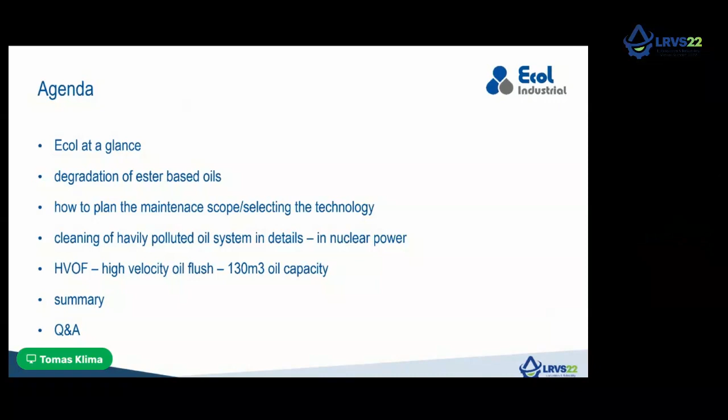Then I'll introduce in deep focus the technology of hydrodynamic cleaning of a turbine oil system, especially here in a specific nuclear power plant where we did the service, with a lot of photos to share with you, followed up with high velocity oil flush of a very large system with oil capacity of 130,000 liters of turbine oil.

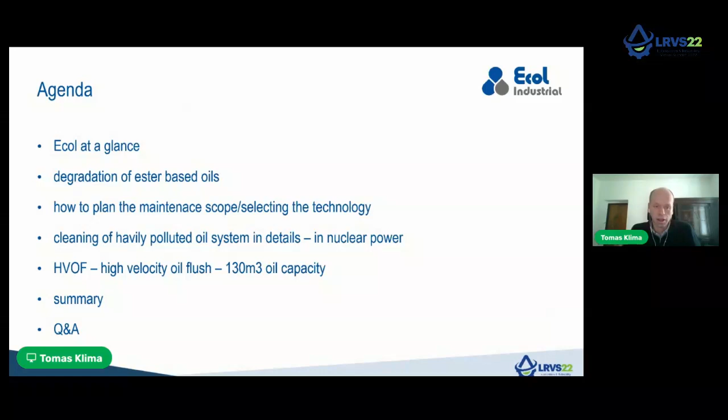At the end, a short summary and then answering your questions.

Ecol is a service-oriented company providing services worldwide, with headquarters in Europe, in Poland, and with subsidiaries in Czech Republic, where I belong to as Ecol Industrial, and a subsidiary also in North America as Ecol North America.

The services we are providing on the market are lubrication and oil services, cleaning and flushing of oil systems, condition monitoring, oil care, and varnish mitigation experience. We have our own laboratory where we analyze the oils and greases.

We are an authorized partner and technical partner from Lotos, Fluitec, and Grease Thief.

We specialize in lubrication management outsourcing, which my colleague presented, where we service over 24,000 pieces of machinery every day, with almost 400 people on board and 70 plus engineers within our company. Yearly, we are delivering 1,500 tons of lubricant. So the scope of our activities is very large.

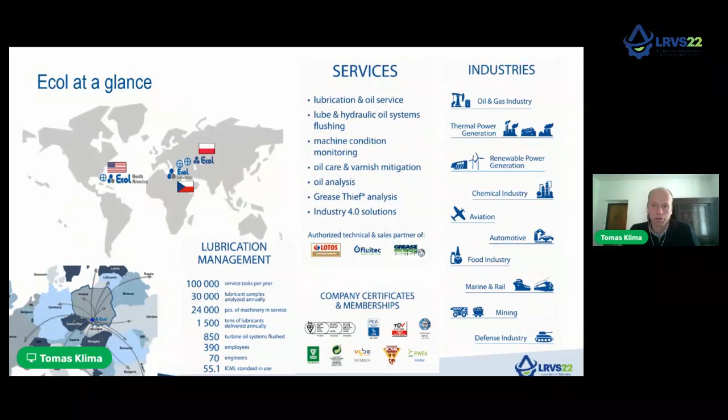The industries we serve you see on the right. I'm especially focused on oil and gas, power generation, and chemical industry. Now I go to the point of my presentation, because the case study I'm sharing today with you was a turbine oil system in a nuclear power plant.

The system was run on ester-based oil, where water is a very dangerous contaminant, and the water content should be maintained very low. Otherwise, hydrolysis is the degradation process that results from high water content.

Hydrolysis is actually degradation or breakdown of the base oil molecules, followed by additive depletion, formation of acids, and of course followed by severe corrosion of the components inside the oil system, especially corrosion of the pipeline.

The aging products from the degradation process and rust pollute the oil system, resulting in increased wear and component degradation.

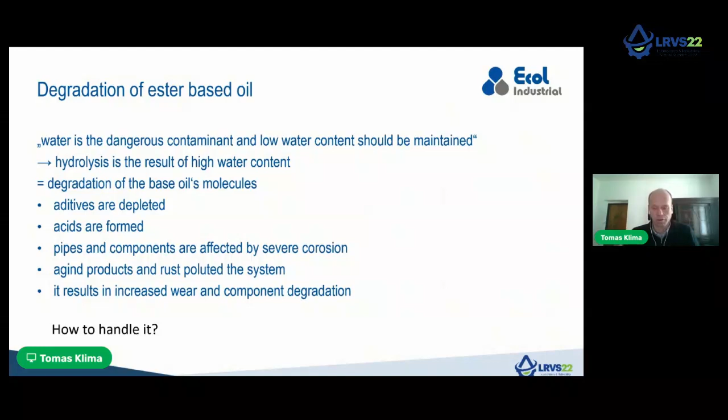So how to handle this issue is the question addressed in this presentation. To evaluate the maintenance prepared for the overhaul or the service, we need to figure out the level of contamination based on lab reports, of course, looking at trends and history, and the lifetime of the oil.

We also evaluate operational issues like temperature, vibration, water content, filter exchange frequency, maintenance history, and if possible, if the customer is smart.

From time to time, also doing video endoscopy of the system to have the background for the decision—not looking only at the oil analysis reports, but also at the real state and real condition of the oil system.

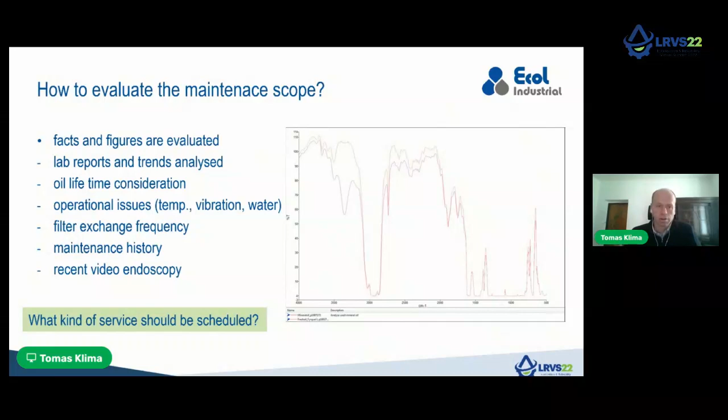If we have information that the system is dirty, and we got information from our customer at the nuclear power plant that the oil was in very bad condition and the system should be cleaned, then we consider together with the customer what options could be done for the service.

Of course, draining the oil and putting in new oil, plus maybe cleaning the oil reservoir, is the cheap option and a good option for financial management, but it has a lot of disadvantages, where the new oil dissolves all the deposits and brings problems for future operation. Dissolving also means running through the system and damaging the components.

Chemical cleaning is a technology I see used very infrequently. It's dangerous for handling, and also dangerous for the environment, and it has a big disadvantage in that it contaminates the new oil after the service, because chemical residues remain in the system and contaminate the new oil.

Solubility enhancers is an option also used today. We have our own experience with it. It has its limitations and advantages. The limitation here, for this case study I'm bringing to you, was the high amount of degradation products plus really massive corrosion in the system, and also the size of the system.

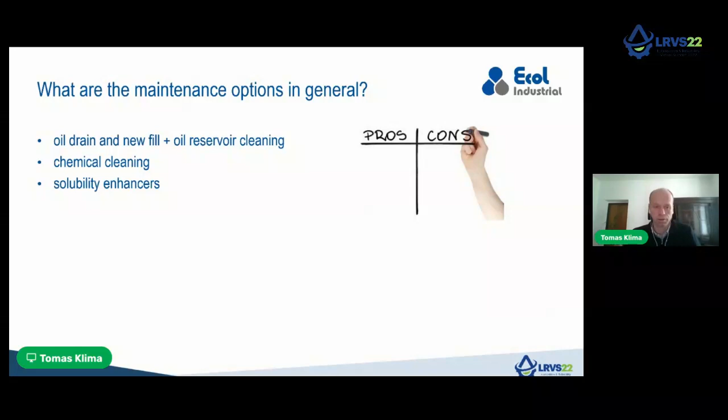There is technology that I'm going to present to you: hydroblasting, hydrojetting. It is applied, and I would recommend always to apply it when a severely contaminated system is in place. I mean a lot of varnish inside, aging products, massive corrosion, or if we have some component failure like bearing failure, which is massive pollution for the system, very hard to flush out.

When oil is exchanged, it is underlined because this is the time if we are changing just the oil with a new additive package, which is very well dissolving the old deposits and making problems during the operation. Usually the filter exchange frequency is very high, and the component failure or the availability of the unit is very affected.

When a new system is installed, it's also the answer to the title, whether to clean or install new. When installing new, you always have new pipes, but they are not clean. They are full of debris from cutting and grinding, and you need to flush it out afterwards and clean it before going into service. So it's better to clean it.

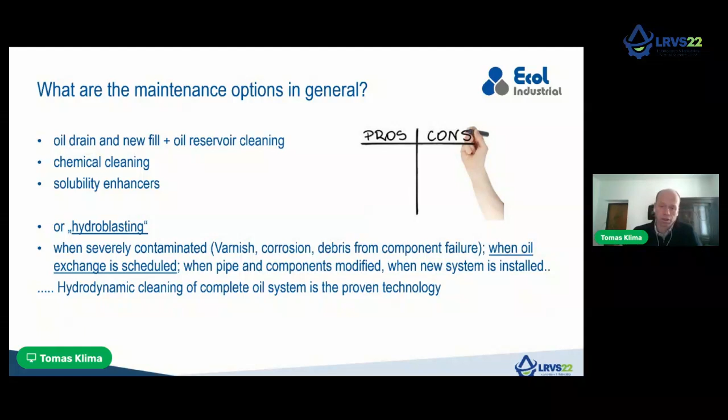Hydrodynamic cleaning of oil systems is the proven technology, which I will show you later on. I'll also highlight the specifics in nuclear power, because we've been working in nuclear power since 2008 and we know the environment very well. Safety first is the main approach in nuclear power. Running on full load with high availability is the general goal, because when it's built, the operational costs are much lower compared to conventional power plants.

Due to the size of the turbo generators, the oil systems are of large volumes. Personally, I'm experienced with turbines here in Czech Republic with a volume of 100 tons of oil. In this case study, I was also present during servicing. It has 130 cubic meters of oil in service, which is really huge. The turbine is 50 meters long, and the size of the pipelines is very large.

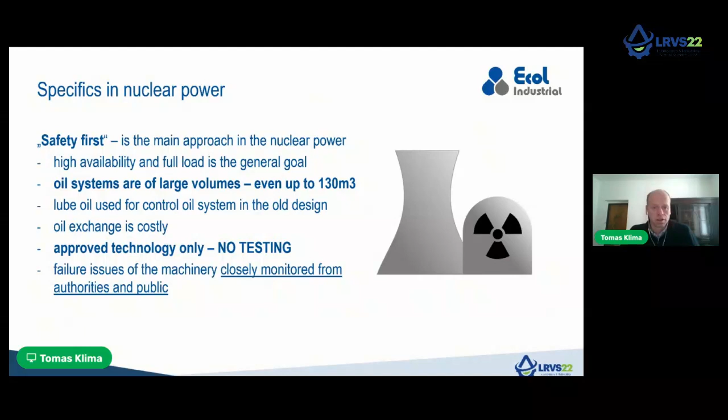Lube oil is usually the same as control oil in the old design, and oil exchange is costly due to the volume. No one in nuclear power is willing to test any new technology, and they don't like testing. They only like approved technology, because all failure issues are closely monitored and reported to authorities and the public.

So when severe degradation and corrosion need to be cleaned, there is a certain way to get rid of the deposits, which is the mechanical force of water jets. This is highly effective to dissolve and remove the deposits, and it's easy to prove.

As you see, the state of contamination of the system presented here was very massive. The system was oil based on esters, due to the decision that it would be safer for the operation. However, hydrolysis here caused very massive pollution of the system over the years.

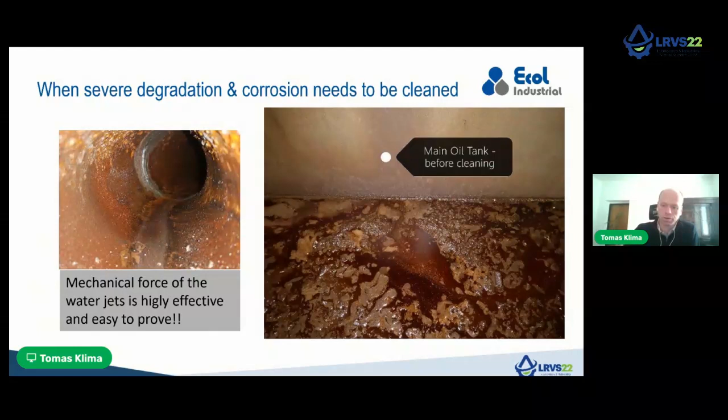Coming to the technology of hydrodynamic cleaning, or hydroblasting, hydrojetting: in this operation, high pressure water is sprayed on the surfaces, penetrating very well both soft and hard deposits, especially varnish and degradation products. This includes any kind of sludge, any kind of deposits like corrosion, or even welding cinders.

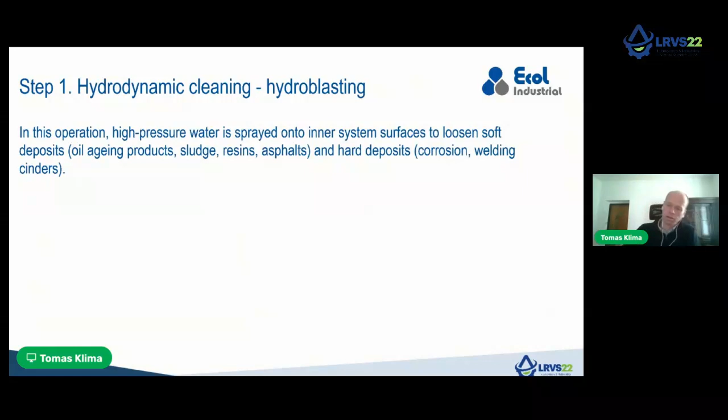How does it look like? The cleaning consists of 4 operations. First is the operation of hydroblasting. You can imagine, on the right corner, this is the rotating nozzle that rotates at high speeds with high pressure water jets that are penetrating the deposits inside the pipeline.

This means these deposits are penetrated and flushed out from the system with the water stream. The pipes are cleaned more than once, two times, three times, and the effect of cleaning is checked visually or by video endoscopy. The pressures we are using are very high, up to 150 megapascal, so 1,500 atmospheres or bars, for you to recalculate it.

The second operation is very crucial, especially for systems with ester-based oil, where the water content should be minimum. This was the biggest concern here from the customer: how to clean it, how to dry it, and be sure that no remaining water is in the system. Generally, it is dried with compressed air with high volumes of compressed and filtered air.

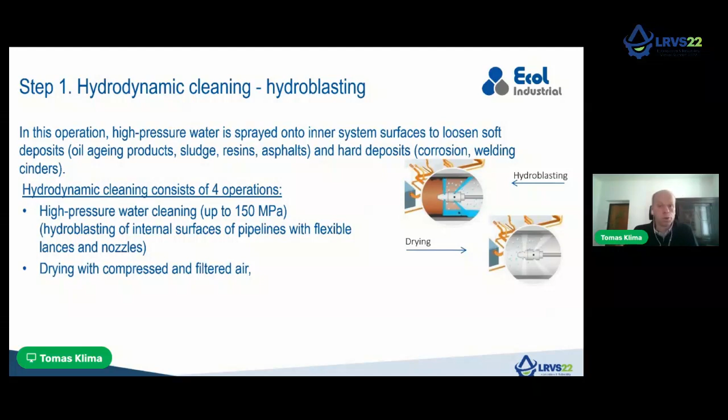At this specific power plant and turbine system, we used extra dryers, kind of ventilators that were venting the system with dried air. After the drying process, we also inserted silica gels in the openings and pipes to be sure that humidity would not affect and collect in the pipes afterward.

After cleaning, the system is sprayed with operational oil as a prevention for corrosion, and the open pipes and openings on the system elements are covered with plastic foil or with special covers.

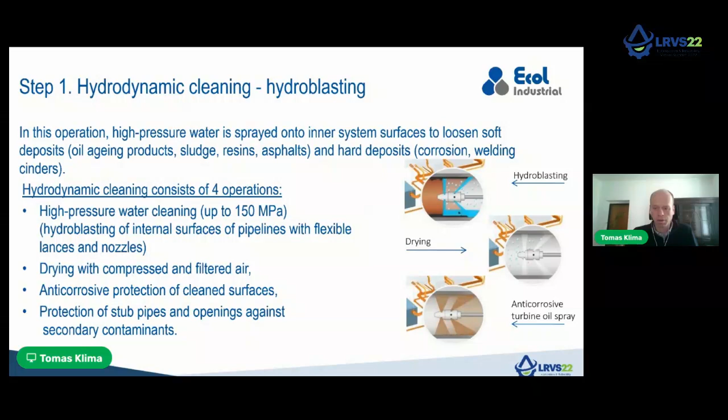So this is the process of cleaning, where all the pipes are cleaned with this method and these steps. And I will show you how it looks like in action.

On the left corner, you see the rotating nozzle, which is to show you how it looks like. However, in the speed and operation, it's centralized in the middle, and the water jets penetrate the deposits. It is pushed through the pipe from one end to another, and all the openings are covered with foil to collect the wastewater.

All other components are also cleaned, disassembled, like oil coolers that are washed and cleaned and assembled back for the next step, which is flushing.

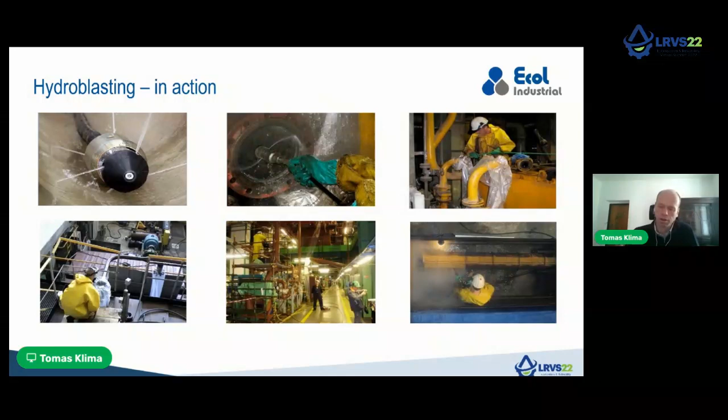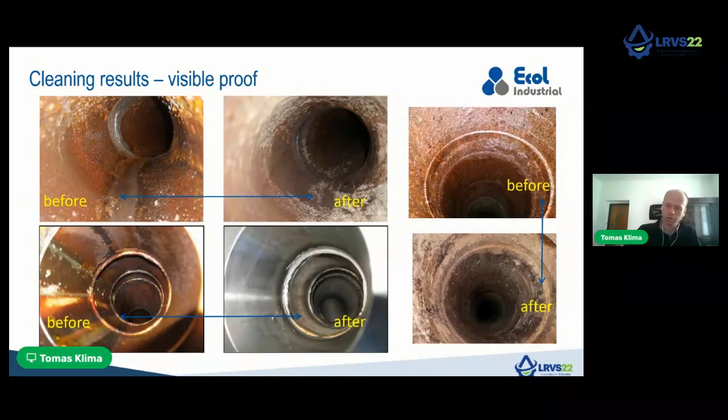Other pictures, down below, this is not from this power plant, however to show you fully the size of the effect. You see on the stainless steel before and after how it looks like, what is the effect of hydroblasting.

After the cleaning, the inspection is done. As I told you, video endoscopy is used. You see that we are going through the pipes, which is measured, monitored, and also reported to the customer that everything is fully clean. And of course, it's good to have the pictures before, how it looks like, to compare it.

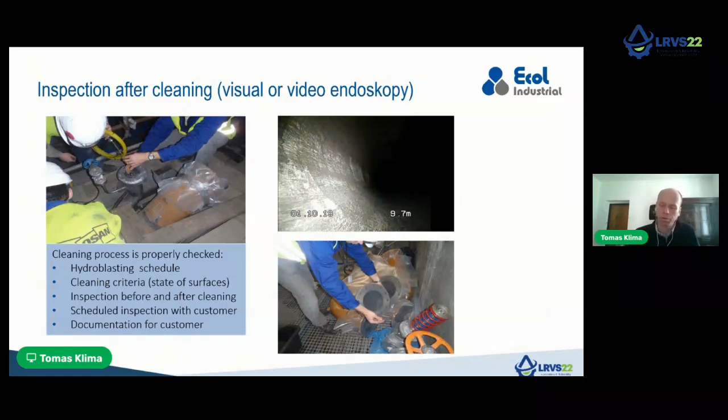And there is a second step of the technology necessary to follow, because cleaning - it's good that we penetrated and flushed out most of the deposits. However, something will remain. The flow of the water jet is not high, and it's not perfectly clean. So high velocity oil flush is recommended,

which has its parameters. We are using external pumps and filters. We are installing bypasses on important places like bearings, servo valves. When control oil is also included, we are bypassing or installing jumpers on pumps and using our pump, which has high velocities.

The filtration is done through absolute fine filters with 3 micron size and with a high filtration ratio of beta over 1000. And also, I will show you on the pictures several important places like bearings and inlet to the bearings, inlet to the servo valves. We are installing special check filters with fine mesh and strong magnet.

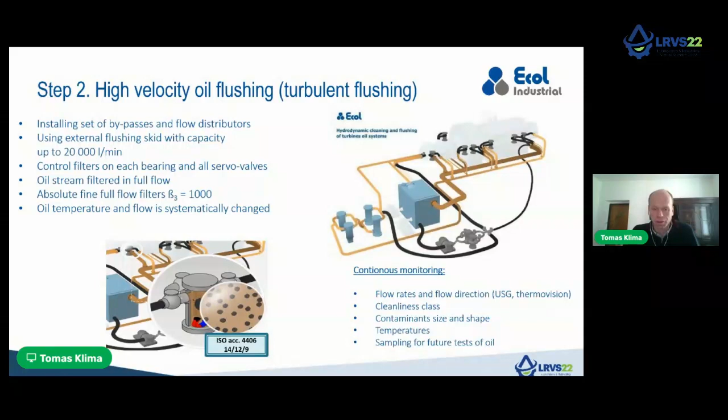So how we approach, what are the specifics of our technology, of our flushing, high velocity oil flush, is that we are installing the check filters that I was mentioning. These special check filters are allowing the team to close the line, continue with flushing on other pipeline, and to check the cleanliness at a specific place.

It is also allowing us to take the samples at those places and check the cleanliness of the oil and also cleanliness of the magnet. I will show you later some other pictures.

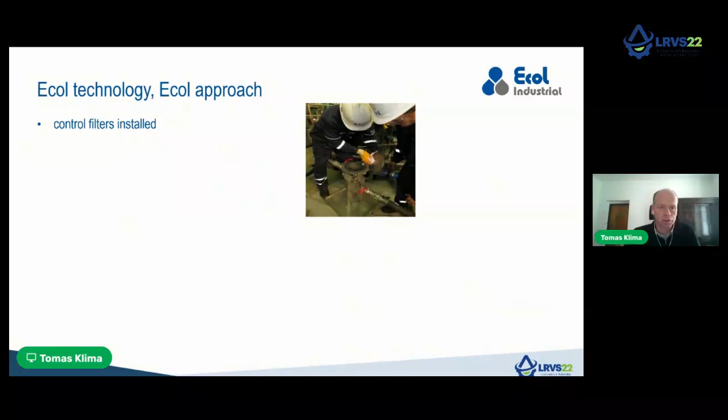Second specification is that all jumpers are equipped with valves, which allows us to control the flushing process, allowing us to increase the flow, to reach the high velocities in each and every pipe, and also allowing us to do the thermoshocks,

which means we are cooling down the specific lines when closing the bypass and then opening it to flush with hot oil.

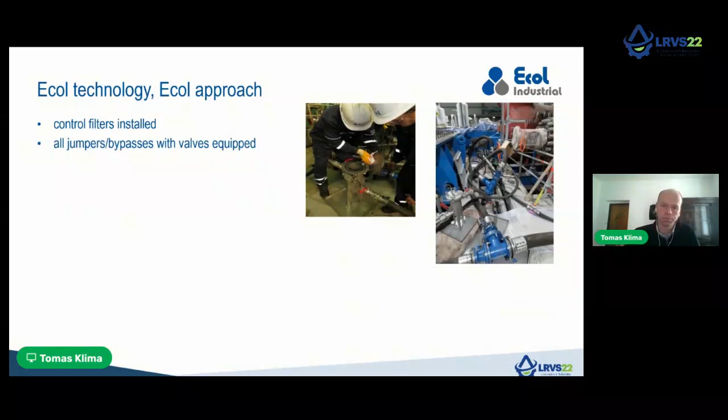Full control over the process, allowing us to flush each and every pipe with high velocities. The full flow is monitored with measurements and also reported to the customer.

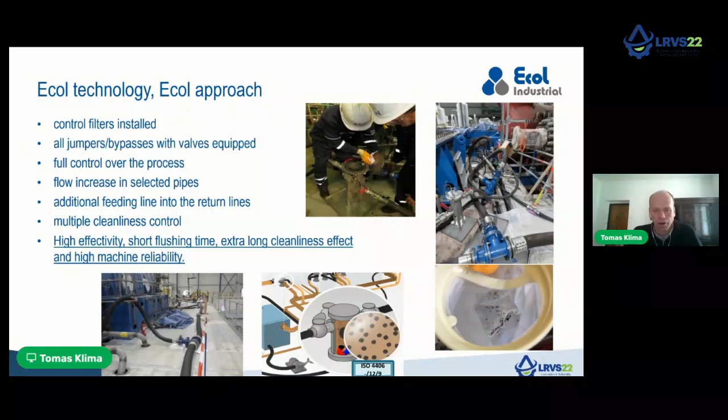And there are several places where we do multiple cleanliness control, not only the ISO code or NAS code from the oil tank, however, from many places. This is a very effective flushing process with a very short flushing time and extra long cleanliness effect and high machine reliability followed.

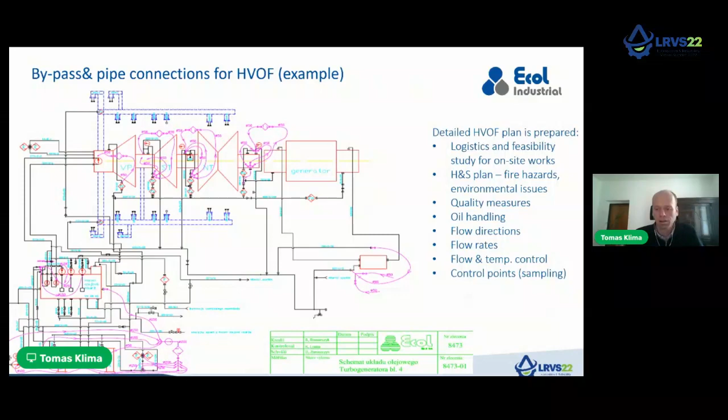Our engineers, before going to the project, are preparing for the cleaning process as well as for the flushing process, showing also to the customer how we are installing and where the bypass is, how the lines are being flushed, and this is the pre-engineering before starting the job.

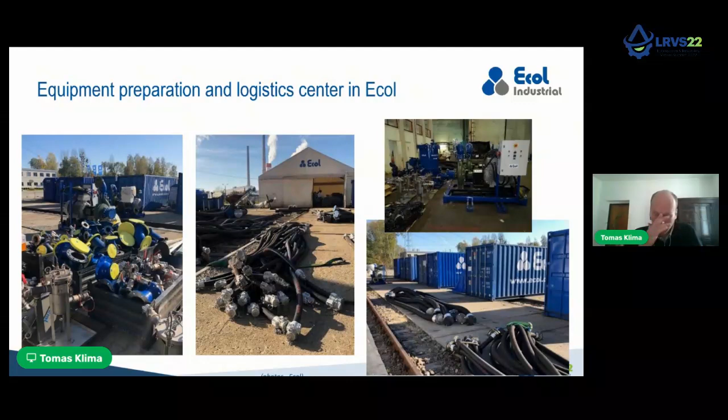It means also a lot of preparation and logistics. If you see the hoses prepared for some general project, or for the project as I'm presenting here, it is a lot of equipment that we need to ship to the site and also install it on the system.

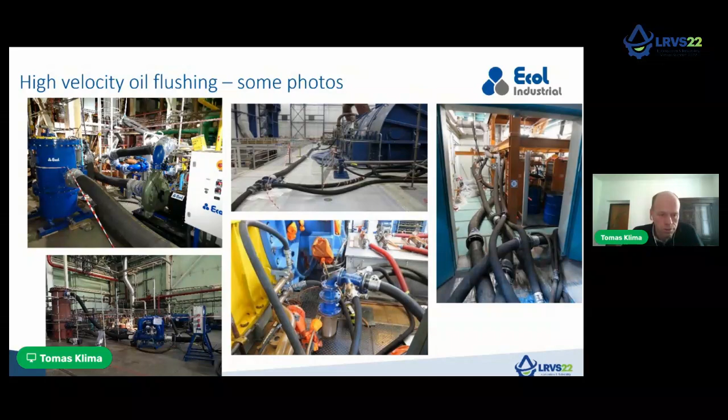On the left down corner, you see extra flushing of the oil cooler, because this is a massive, high volume oil cooler that needs to be flushed separately to shorten the flushing time and not make the flushing longer. We have special equipment that flushes the oil cooler in both ways, turning the direction of the flow, which allows us to make it shorter and more effective.

Other pictures from other projects show the scale, what it means to install all the bypasses on the bearings of the turbine. In the middle, you see a 200 megawatt turbine, so imagine how it looks on the 1000 megawatt turbine that I'm presenting here.

However, the design was Russian, and all the pipings are under the turbine, so we have no picture like this to show the scale. As you can see on the left corner, there is this specific check filter where we are taking samples during the flushing.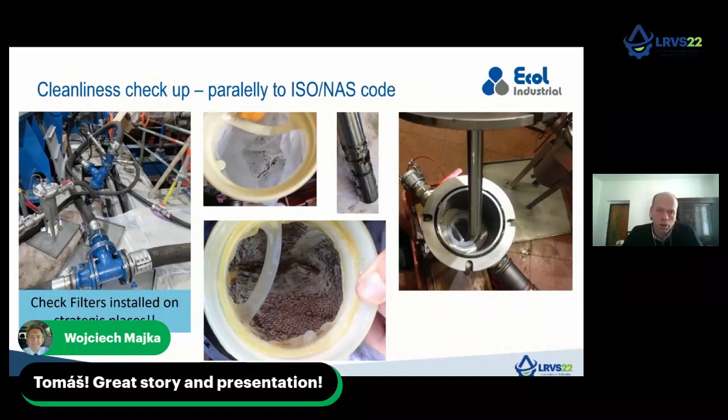Also checking the filters and the magnets, the construction of the filter you can see here on the picture on the right. The neodymium magnet is very strong to catch all the debris and magnetic particles that are trapped on it. Inside is a specific filter with size of 100 or 75 micron, or whatever size the customer wants, and there we are checking the cleanliness and the particles present in the system, not only the ISO code from the oil sample.

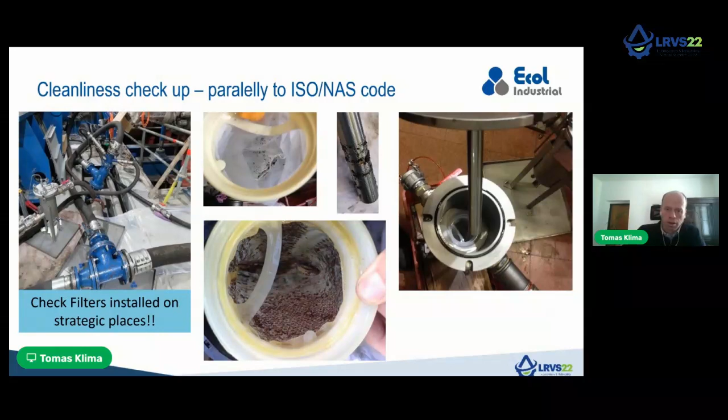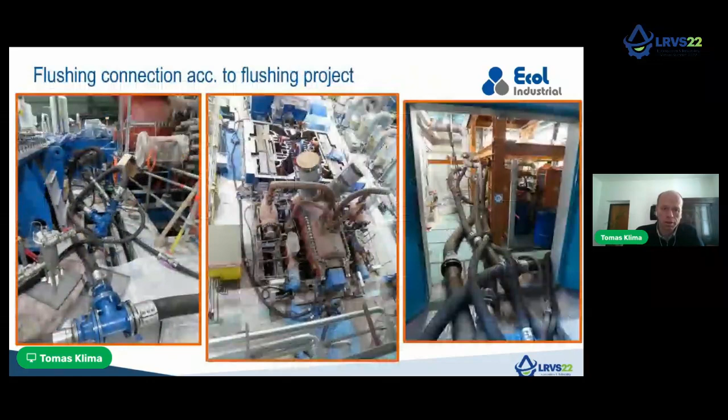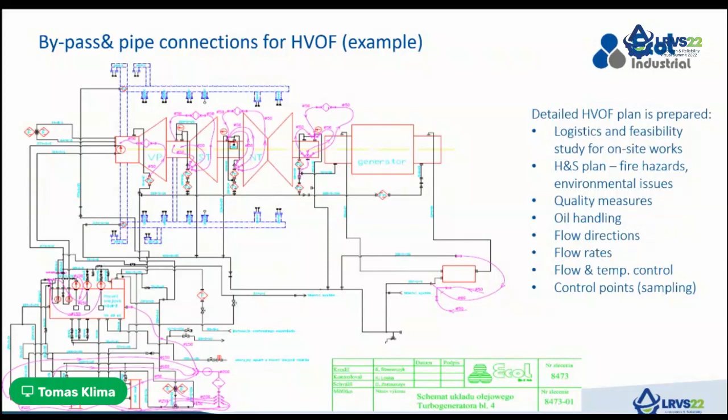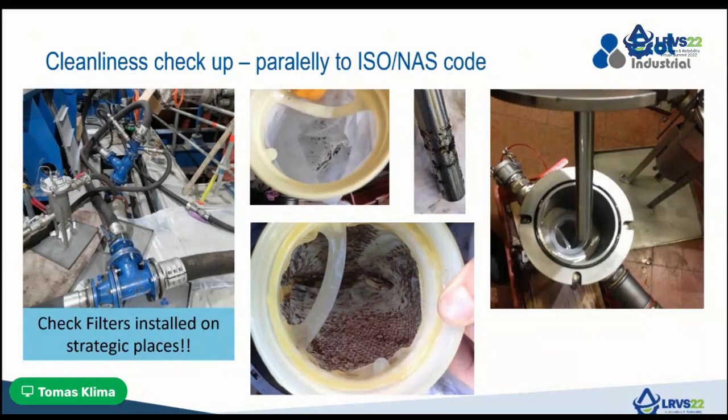On site we are of course taking samples. The samples are taken from several places. Going back a little bit, you see that on each bearing there is a control filter where we can sample the oil and also control the special filter inserts, which is much better and faster, also speeding the flushing process, allowing you to continue flushing and control the specific place. Because we can close it, take it off, control it, change it, and otherwise flushing on other places is still continuing.

So when taking samples from the control filters, they are monitored under the microscope and also with the particle counter, which shows us the cleanliness code and also the relative humidity of the oil, showing what is the water content, to prove to the customer that the system was dried completely. And of course, this is only relative humidity.

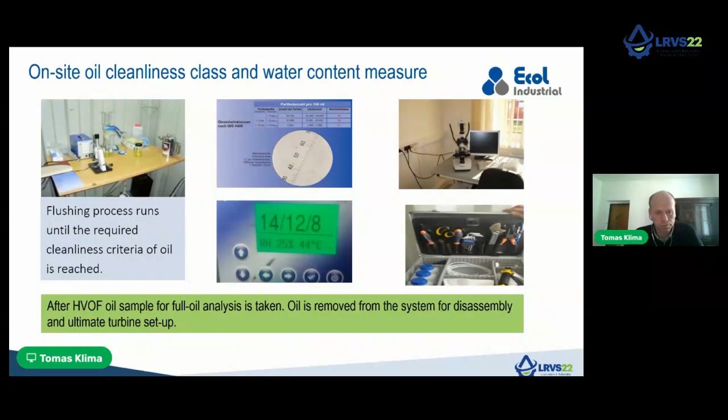Also, the final check is that the samples are sent to the laboratory, either to our laboratory or to the laboratory on place, which the client has. If this is clean, the oil is again removed from the system, drained. The oil tank, oil reservoir, is cleaned because we cannot reach any turbulence in the oil reservoir. Therefore, it is collecting the dirt that was rotating in the system, and this needs to be clean before the final fill in and before the final startup.

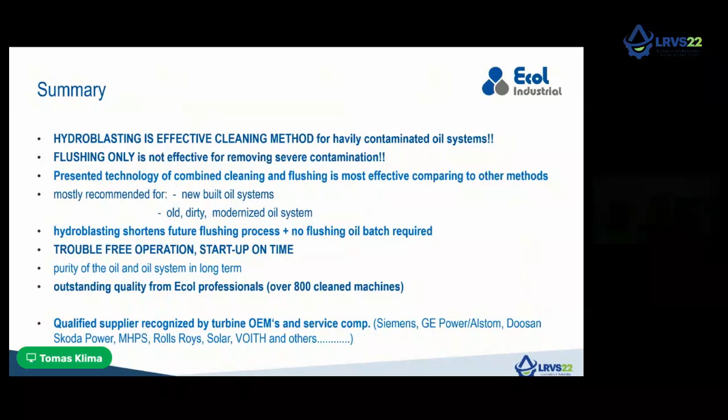So I don't know how the time is, but I think I'm at the end. My summary is that hydroblasting is an effective cleaning method for heavily contaminated oil systems. It's much better to clean it than to build a new one. As I mentioned, building a new one means you have new pipes that are not cleaned enough and you need to clean them again. This is much more sustainable when we are talking nowadays about sustainability, and much more effective.

Flushing only, because of course flushing is the standard maintenance process, is not effective for removing severe contamination. Even with our equipment, if you wouldn't clean the system prior to flushing, flushing will take weeks, and with high velocities, all the deposits are removed and circulated in the system. The filter exchange frequency will be high and very costly, and the effect will be low.

The presented technology of combined cleaning and flushing is most effective compared to other methods, mostly recommended for new build oil systems, as well as modernized, old and dirty, or seized after the failure. Hydroblasting shortens the future flushing process.

No flushing oil batch is required. It means that if we are cleaning with high pressure water, we have no risk of cross-contamination with old oil when we are, for example, changing for a new one, for a different type, different batch, or even different technology from group 1 to 3 to 5. It doesn't matter if this is hydroblasted, we can use whatever oil we want.

Trouble-free operation and startup on time. This is very important for the customer. This is proven after several years of operation. These systems are in very good condition. Comparing to, for example, customers where the system is clean and others are not, the difference is high. Outstanding quality from Ecol professionals.

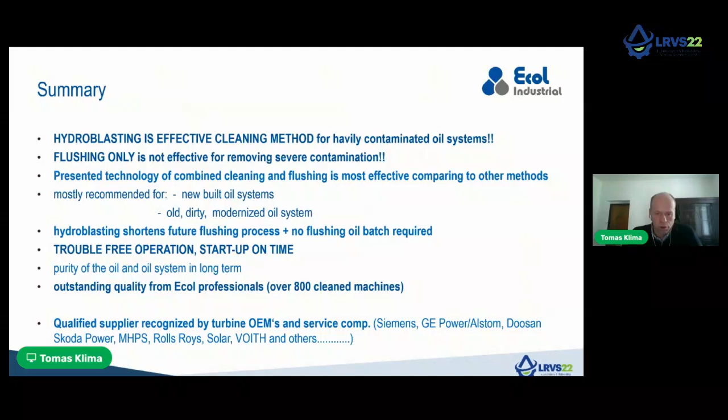I've been with the company since 2005, but Ecol started in 1991, so we have celebrated 30 years. Over this time we have cleaned and flushed over 800 different oil systems, not only turbines, but oil systems from large hydraulics, engines, large gearboxes, couplings, and a lot of others. We are a qualified supplier recognized by turbine OEMs and service companies, including Siemens, GE, Mitsubishi, Hitachi, Rolls-Royce, and others. So thank you for your attention.

Yeah, I don't know if I can switch to... Do you hear me? I stopped sharing the screen, and I'm ready for the questions. Thank you, Tomas. If something necessary, I can share the screen again, but I don't have two monitors, so I'm not seeing the questions, or I'm not able to communicate with you.